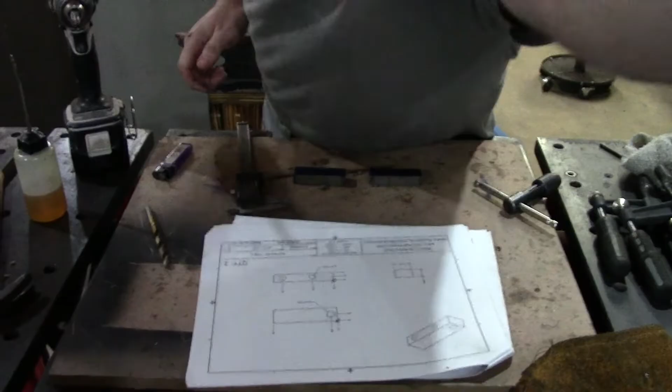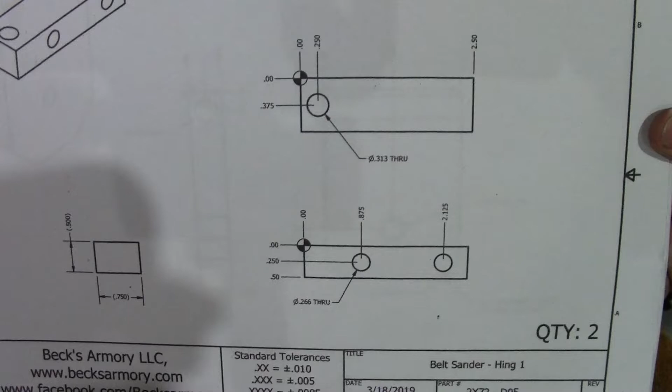Alright, welcome back. This time we are going to make detail number 5. This one is a really easy one and shouldn't take too long at all. In this one there is no hole table because it is just that simple. So I'm going to go ahead and try to get a little closer here. Give you a chance to pause, capture that data.

Alright, so that is the completion of detail 5. And this is the bracket that holds your tracking wheel. So these two right here. So on this hole here, it's a 5/16 hole. You can ream this if you want and use a pin, if you want it to be really precise and really rigid.

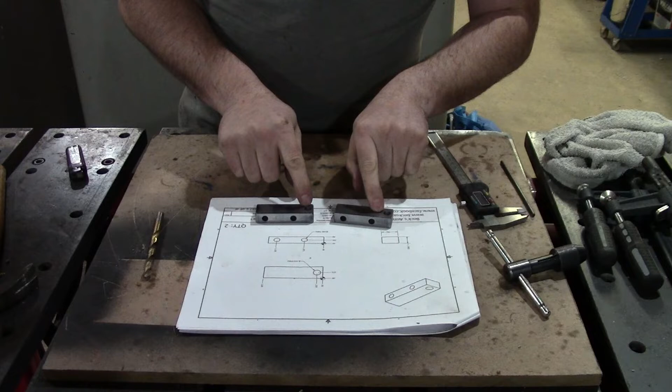So it's one of the things that I want to make sure works before this is all said and done. If it turns out it has to be precisely reamed and a pin used, then I will replace this video with an updated one. If it works great, then rock on.